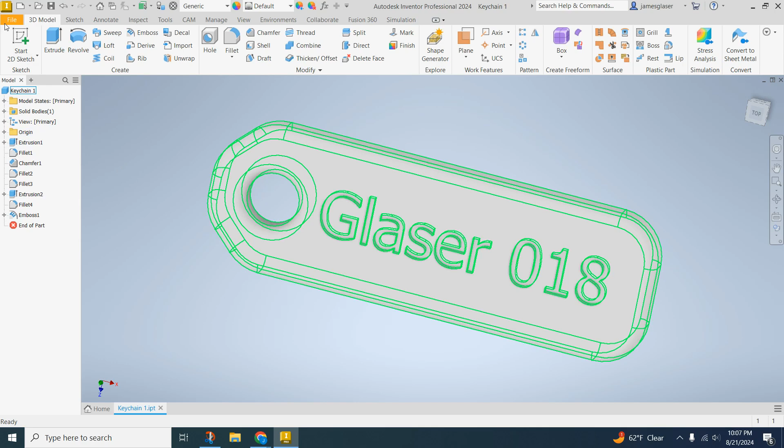This is a refresher course on how you make a keychain or a name tag. If you've already done this, cool, make sure you follow what you know how to do. If you haven't, here's a quick thing on how to do it.

Open up Inventor 2024, 2025, 2023, whatever you've got, and start a new part. Go with metric in the templates, click on it, and do a standard millimeter IPT. Double click that, and it'll open that up.

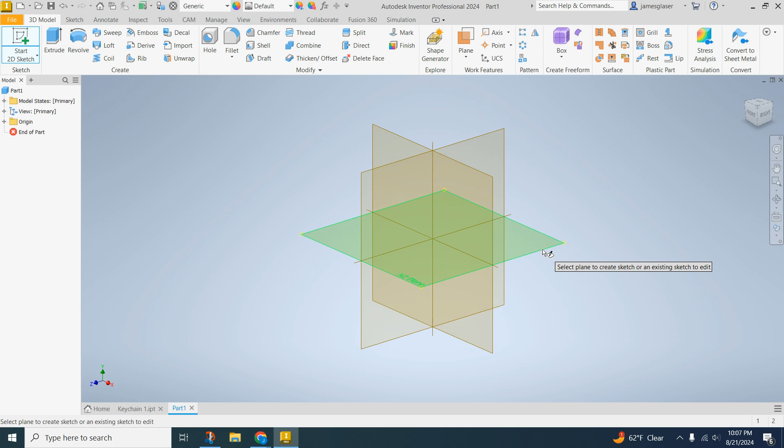Now start a 2D sketch. I'm going to click on this plane, the XZ plane, because that makes the most sense in my head. It pops up on the view cube that I'll be using the top. Click the rectangle tool, click in the origin, and drag out. I want this thing to be about 50 by 25. 25, 50, boom, that's what I want.

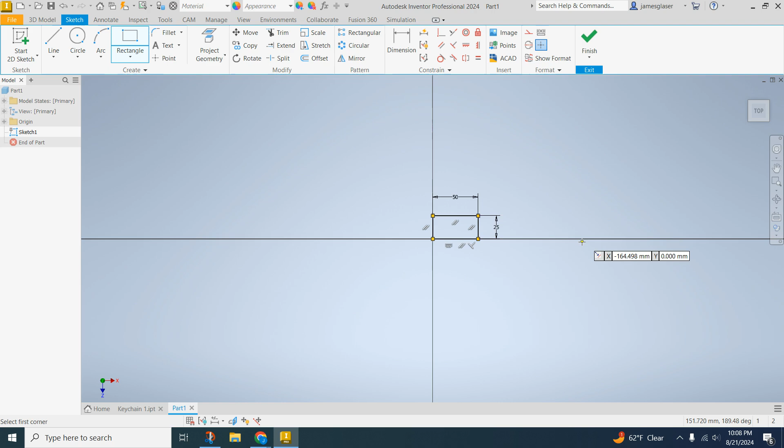Now I'm going to hit E to extrude that. Click the closed area, and it's going to be extruded 5 millimeters. Now let's go ahead and look at the top of it. Yay, looks like the top of it.

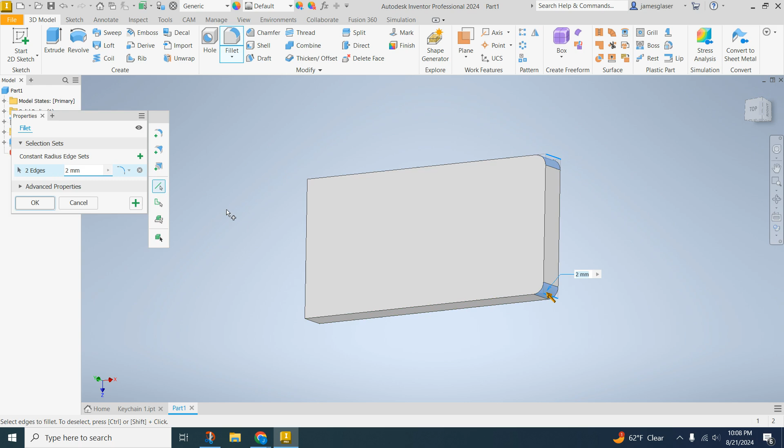Now I want to go ahead and fillet these two corners because I don't want sharp edges on this thing, since it's going to be in my pocket. So I'll click fillet here, and fillet here, and just drag them in, increasing that until it looks good. 4? Nah, 6, that's a little bit better.

I like it. Now I want to come over here and chamfer this other side. So I'll click my chamfer tool, click here. Whoa, whoa, whoa, why am I filleted back there? Cancel. Edit feature. There we go.

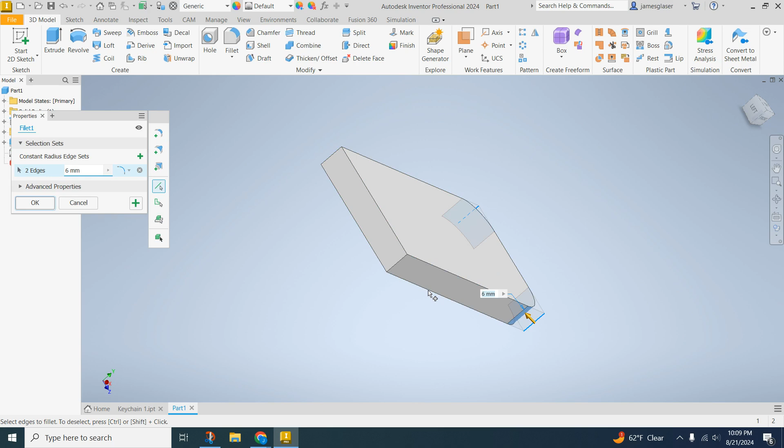Much better. Chamfer that edge, as well as that edge. I liked 6 millimeters before, let's look at 6 millimeters again. I want to go bigger, 8 millimeters, that looks much better. Apply. Okie dokie, cancel.

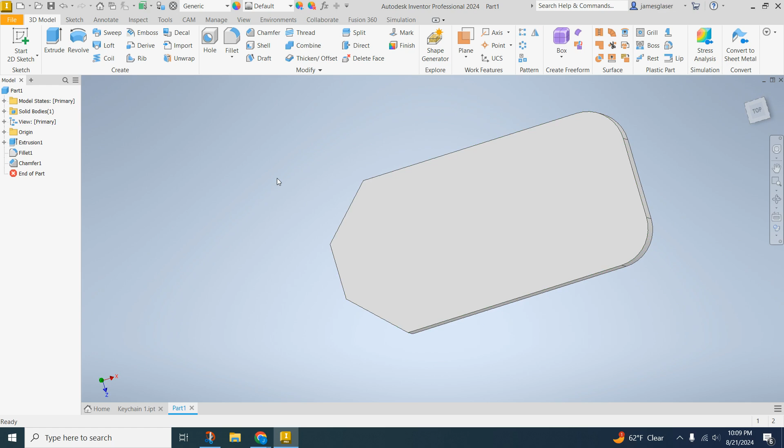Now what I want to do is fillet these edges. So I'll grab my fillet tool again and fillet that one and that one and that one and that one. Remember, you don't want sharp edges on something that's going to be in your pocket, and this might be in your pocket.

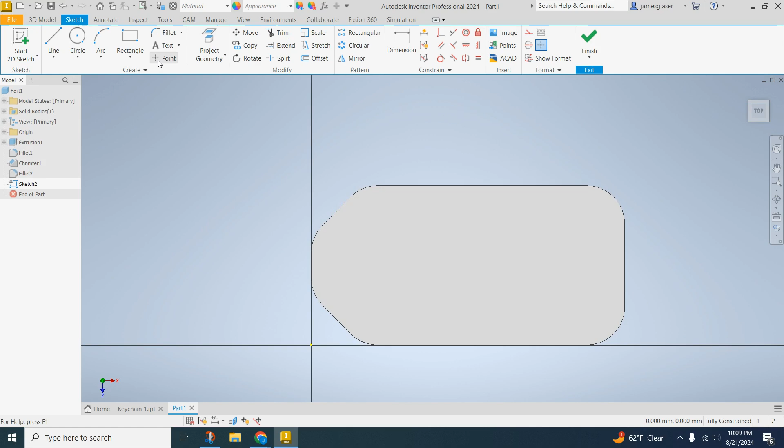Now I'm going to start a 2D sketch on that surface because I need to place the hole that my name tag is going to have. I'll grab my project geometry, and project my cut edges because I want to be able to see those in the sketch. And I'm going to grab my point tool. See how it locked that midline? Yeah, I'll click it so that way it's not locked to any of those.

Now I'm going to grab my circle tool, and click out and drag out a circle. I want that to be at least 5 millimeters across. Okay? Now, maybe I'll make it 6, just for fun.

Now, see how it just bounced up there? I need to make sure I've got my horizontal constraint between that point and that point. And I want to make a vertical constraint between, let's see, that point and that point. Nah, going to delete that one.

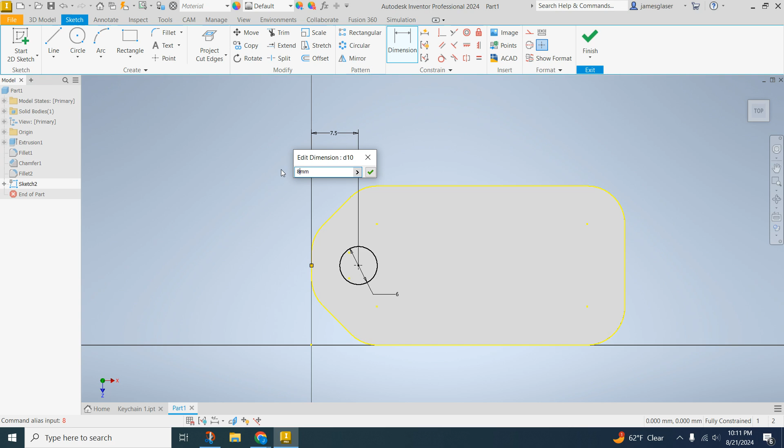Maybe 8, just to make it look right. All right, now I'm going to extrude that. I'm going to cut that hole all the way through.

Cut through all. Okay, now I want to add a couple more fillets. I want to fillet both sides of the hole, but I don't want it to be that big of a fillet. I only want it to be like 1 millimeter, maybe 1.5.

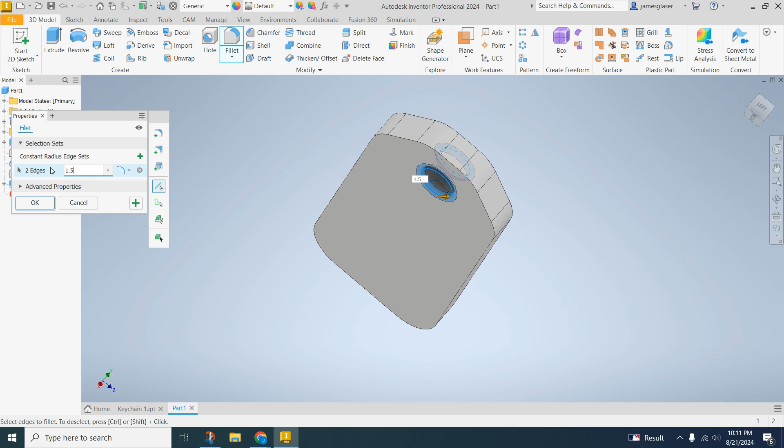That looks decent. And I also want to make sure that I have a fillet going around this edge. So I'm going to grab a fillet tool, and I'm going to do that. And I'm going to look at how much it's filleting that, and it looks good.

Now I need to go ahead and add my name to the top. So I'm going to start a 2D sketch on that surface. Now I need to grab my text tool, and I'm just going to grab and click and drag out a box.

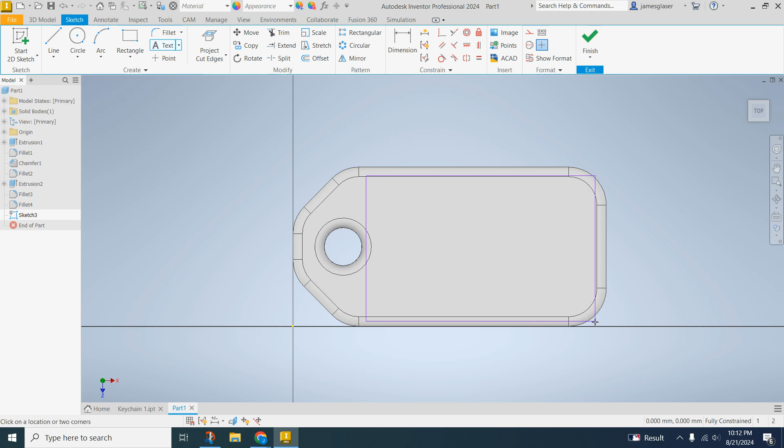Okay, see how I'm hovering over those edge lines? Pretty close to them. Now I'm going to type in my name. First off, I'm going to make it, yeah.

Tahoma is a decent font. It comes out well, but... you should tell me what your name is and what bell you're in my class.

And I'm going to do 6 millimeters bold as our first, it's kind of a jumping off point for me. And now I'm going to hit escape to drop my tool.

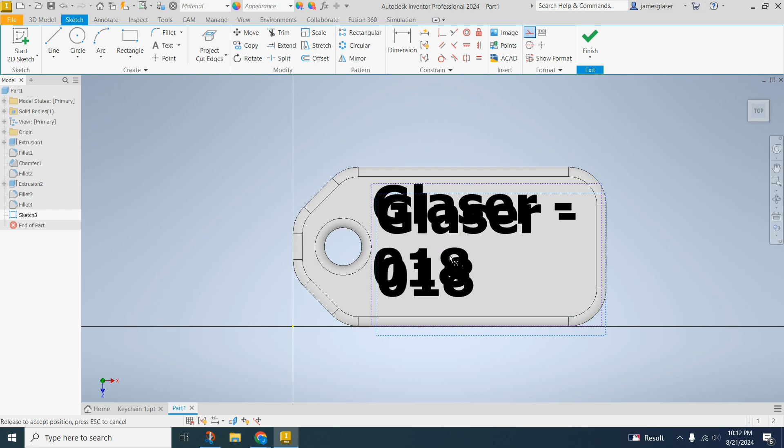Now see how that looks kind of weird? I don't like how that looks. So I'm going to double click it, and I'm going to go ahead and center it. That looks a lot better.

I'm going to get rid of that dash though. I don't like that. That's gorgeous, I love it.

Now I'm going to go ahead and extrude that. Hit the E, or I'm sorry, not extrude. What am I thinking? Emboss that, because it's text.

So up, come over here to my 3D model tab. I got to finish my sketch. Come over here to my emboss. Where's the emboss? There it is.

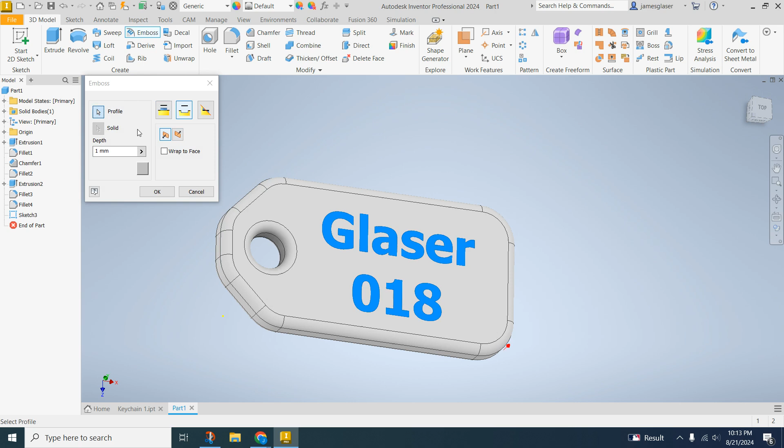And I want to go into the surface. So I'm going to go into the surface right there. And I'm going to go to a depth of 1 millimeter. In 1.

Okay, see that? That looks great. If you bring it out, it's going to scrape off when it's in your pocket. So now, this is your finished keychain.

File, Save As. Make sure you put this in your project folder. Okay, this folder, or this item, I'm going to go ahead and place in my flash drive, just like you should normally.

Inventor 2024 is the file. This is going to be Nametag 2, underscore my initials. Save. All right.

And now your assignment is to give me an STL. So I need to export this as a CAD format. And I need to make sure that this is an STL file format so I can 3D print the thing. And we're going to click Save.

And then it's going to stop and it's going to think for a minute. And you're not going to see anything really pop up. Okay, actually, I just see it pop up right there in my recent files. You should be able to find it in your file folder.

So we just completed this one right now. So that is what you need to upload to the Google Drive.